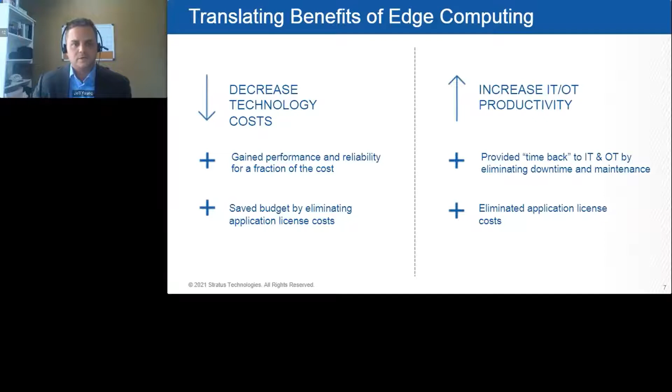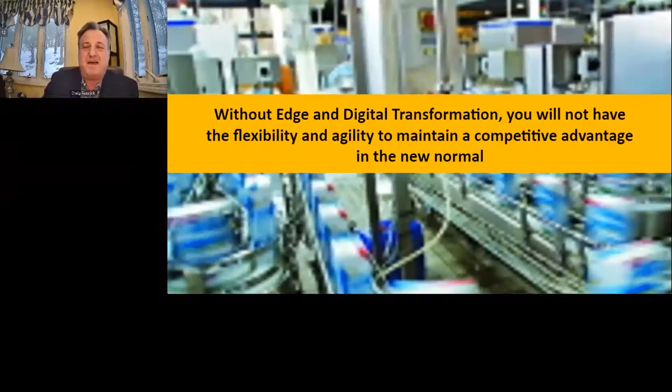And we start off with a very bold statement, which is: without edge and digital transformation, you won't have the flexibility and agility to maintain the competitive advantage in the new normal. And it's pretty strong.

To be very honest with you, once the pandemic hit and we were forced into remote working, social distancing, problems with visibility and flexibility of a supply chain, it really accelerated the whole demand for edge computing. People are so worried about how they're going to continue to operate their plant, how they're going to maintain what's become a very common term since the pandemic: operational resilience. Are they going to survive not only this pandemic, but have an infrastructure in place to survive another catastrophe in the future? Are they able to fulfill orders, especially if they're in a product category in very high demand as a result of the pandemic?

Is my personnel protected? Do I have the right cybersecurity techniques to protect against the fact that I'm now allowing all this remote access I did not have in the past? So we look at how an edge platform can help in that area. These are things designed for automation, for people with an OT background, because now they can be deployed relatively easily. It really changes how work processes are handled, how information is gathered, stored, and executed, because it's at the device level. It still maintains its real-time status and gives people that extra visibility, especially if you're not in front of the machine, whether in a remote knowledge center or working from home. There's really no way today you can be completely effective if you don't have an edge strategy as part of your digital transformation process, especially in this new normal.

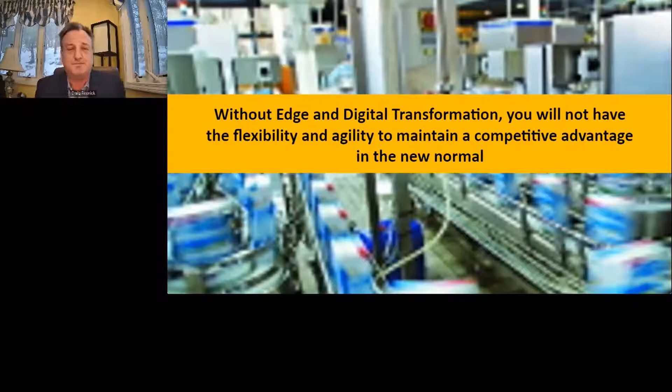Hey Craig, this is Jeff. I have a quick question for you. At a high level, how do you feel leaders are prioritizing digital transformation initiatives right now? As we move into 2021, do you think they're approaching this from a more risk-oriented or reward-oriented position?

I would say our dividing line is March 2020. Before March 2020, people would look at this as something that was nice to have, maybe put in a 3 to 5 year plan. We were still going through the calculations of whether this edge and digital transformation strategy had a payback, and once we got a better handle on that, we'd decide how soon to execute.

Post March 2020, all of a sudden ROI remains critically important, but then the term operational resilience came into play, and that completely accelerated people's digital transformation programs, bringing edge devices to the forefront, because they needed to execute the ability to work remotely and do it in a safe and secure fashion, having information at the device level transmitted to the person wherever they may be, while processing that information in real time with a hybrid strategy working with the cloud.

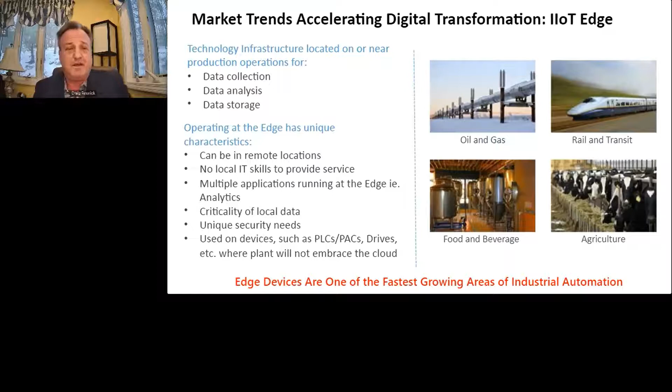If you really did not have this process going on, you probably couldn't fully take advantage of having the edge strategy, because you wouldn't have that ability to get information up into the cloud. Even though the information is processed in real time to avoid any sort of latency, that information, to really close the loop, has to get up into the business systems. That's the reason why cloud and all the applications of the cloud are really so important. So you really have to make sure that you have that whole IT-OT convergence.

At ARC, companies that have really accelerated their process greatly with IT-OT convergence, it's almost getting to the point we sometimes call it IT-OT fusion, because we could see a period of time, 5 years from now, when we may not even see a difference in certain facilities between their IT groups and their OT groups, that they may begin to really fuse into one.

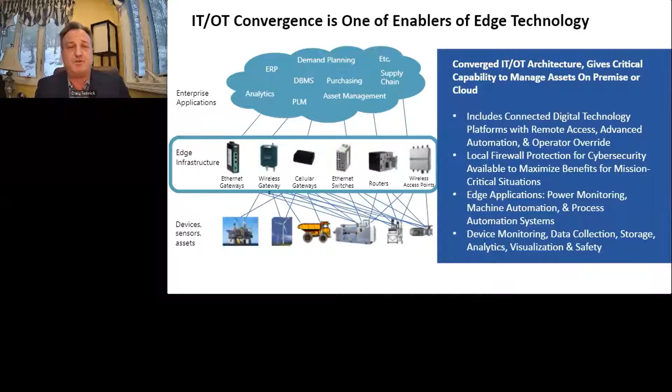So sometimes people will say, when we present edge within many of our end user and OEM clients, well, what's in it for me? Here I am, I've been working for a long time in this industry. Tell me why I need to learn about the edge, both from a professional side and also personally. And it really is part of a whole new way of doing business and operating.

It's really a whole different way of leveraging all the different types of services that are going to be available. So now no longer are you always just collecting money from your customers on the CapEx side of the budget, but now you're able to sell some services and recurring revenue that will allow you to get on the OpEx side of the budget.

And it also helps as companies are beginning to start to sell what we call outcomes instead of products. So instead of just selling you product A, we're selling you a result. So your customers can improve their own business model. So it makes the relationship very, very dynamic.

It's really important professionally that people understand where some of these changes and nuances are in the marketplace. And what it also does is it helps you grow your own professional skill set and your own career.

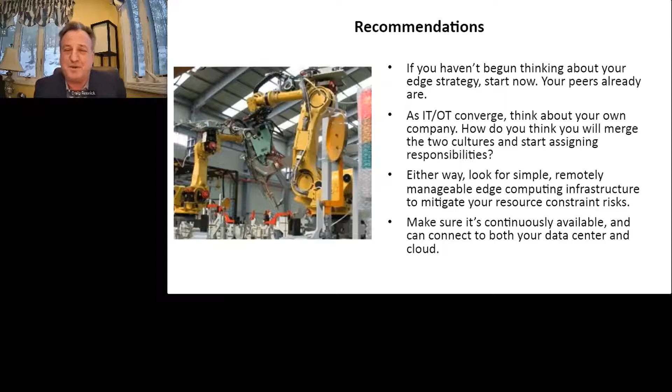Thanks a lot, Craig. So I'm going to talk a little bit about what we have done here at Streamline, and a little bit about what Craig just spoke about - how we can take an OT, an IT project that we've developed for ourselves and turn it into something that actually potentially has commercial value. I'll talk about that at the very end, about where we're going with that.

A little introduction to my company, Streamline Innovations. Our mission is to eliminate pollution through technology. We design, build, operate, and integrate our own units. We call them Valkyrie units, and they remove H2S from natural gas. We also do purification of CO2 streams. We remove ammonia, carbon dioxide, H2S. We are in that space.

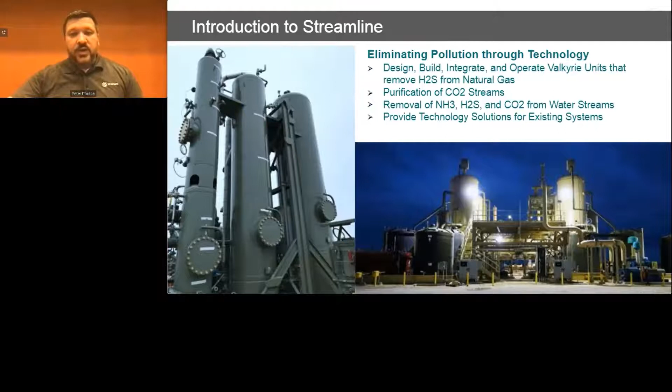We've found that a lot of our work is providing technology through existing systems, so we're doing work on existing builds as well as new builds for ourselves. So this is one of our units - this is the Valkyrie unit, the Valkyrie process.

I don't want to get into too much chemistry and too much talk about our chemistry, but I am going to give a little quick lesson about this. This unit removes hydrogen sulfide from natural gas. Hydrogen sulfide is an extraordinarily toxic chemical that is found in 40 to 50% of all wells in the world. The United States is no exception. Obviously, when you turn your stove on, you do not want H2S, this toxic chemical, coming into your home. So we need to remove it.

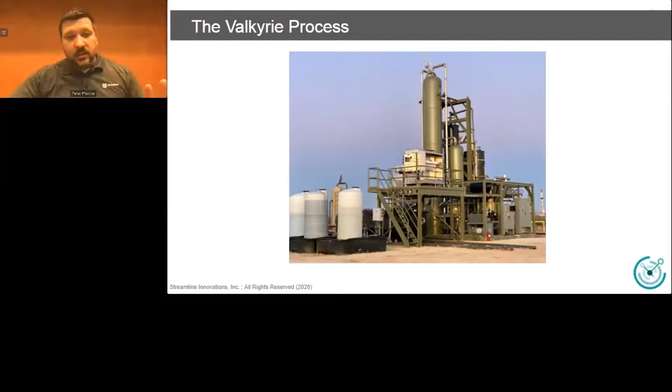There's a bunch of technologies out there, and ours is really kind of a unique process that we have brought out of the old days. It's an old process that we've really brought into a new technology, really through operational technology, and that's what I'll explain. You don't need to know a lot of process or chemistry, but I'm going to put a picture up.

This is the diagram of how the unit operates, but there's two important points. The first is when the gas mixes with our liquid, our Talon chemistry, there's a chemical reaction that occurs, and when that chemical reaction occurs, the H2S is destroyed. If the reaction does not go far enough, it will give off H2S, which is not good. If the reaction goes too far, we'll destroy our chemistry, and as you'll see, we can't reuse it.

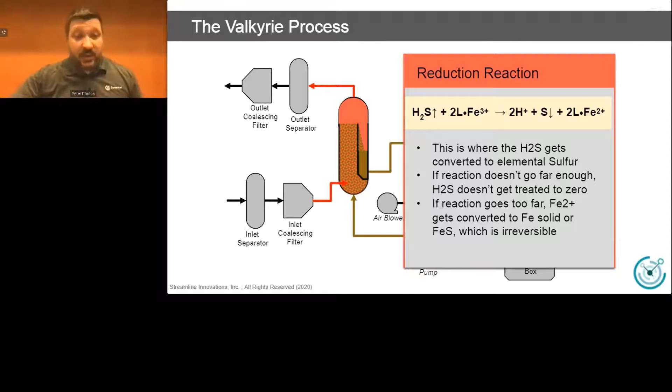So the second thing to look at is our regeneration reaction. We mix our chemistry with air, and we can reuse that chemistry over and over again. So it really is clean tech. It really is our clean tech product.

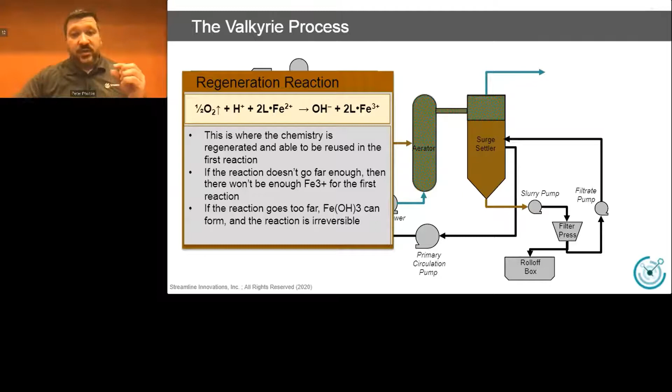But there's a condition. If you don't put enough oxygen into the system, you don't regenerate enough chemistry, and you'll slip H2S. If you over-oxidize the system, you'll burn the chemistry and won't be able to regenerate it. So the short story is we're running this reaction as clean tech, removing hydrogen sulfide from natural gas, and we have to control two chemical reactions within a very exquisitely narrow band.

That's a challenge, because if you think about it, that's not really done except in refineries. But it's more than that. We're mixing, we have the gas flow rate changing minute to minute, the H2S concentration changing day to day. So we have variable inputs, and we have to maintain these chemical reactions.

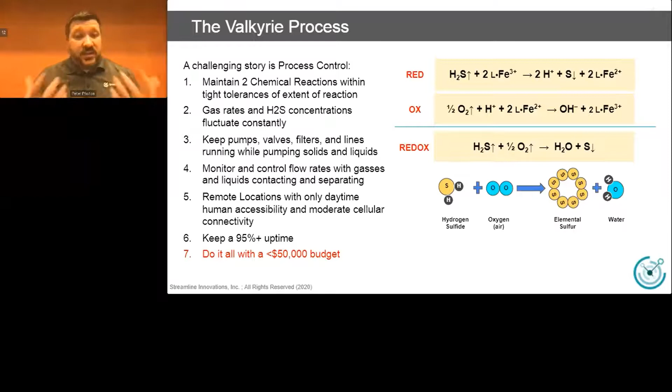We also have pumps, filters, lines, valves, all these typical process industrial equipment that we have to keep running. And then we have solids, gases, and liquids, because we produce elemental sulfur, which is a fertilizer. So we effectively convert this toxin to a fertilizer. We have solids, liquids, and gas circulating through our system, which requires a tremendous amount of maintenance and maintaining levels and flow rates. They can't be too high, they can't be too low.

There's a lot of control going on here. So not only do we have a chemical process that we're controlling, we also have a standard plant that we're controlling, which is also more difficult because of the presence of multi-phases.

Now, to add to the story, these units are typically in remote locations, an hour or two drive from the nearest human, really only accessible during the daytime. Our clients require 95+% uptime, and our entire OT budget is $50,000. Go do it.

It's a very difficult challenge, extraordinarily challenging, which is why this technology was not truly commercializable until this decade, until Streamline really took over and brought in some impressive operational technology tools to help us control this unit and do this task.

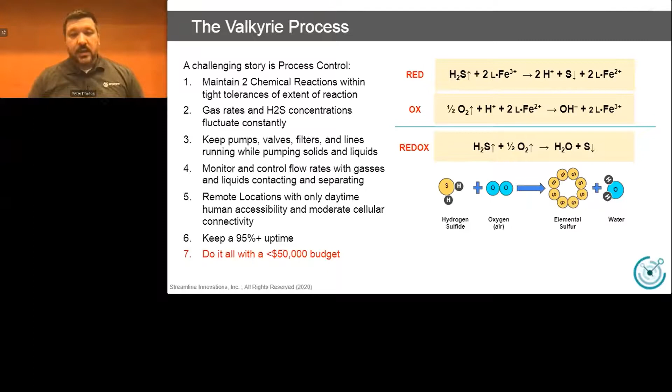So this is our SuperValkyrie project. This was a project in Pecos, Texas, for a client. We're treating about 60 million cubic feet of gas. It's 3 amine plants and 3 Valkyrie plants.

Now, typically when you build these sorts of plants, the rule of thumb is you need about half an FTE per unit. So with 6 units, you're talking 3 operators, and then daytime, nighttime shift, 6 heads, 6 FTEs. It's labor intensive to operate these units. Plus maintenance requires call outs to the site, and the support team needs to go out to the site to control it.

And the mission for this project was to do this with only 3 FTEs. So keep maintenance to a minimum and keep support off site. I'll show you how we did.

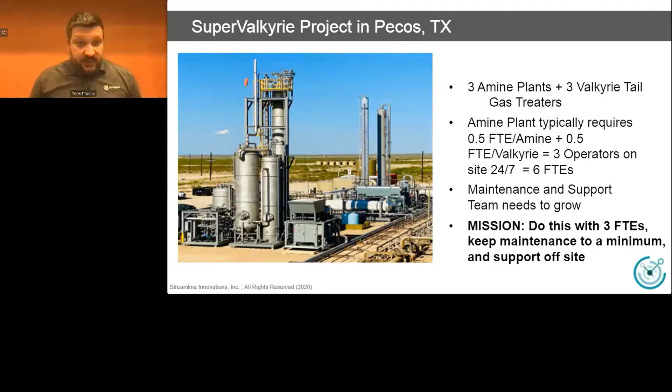So we chose the Stratus ZTC Edge. We chose this for a couple of reasons. Number one, because of the redundant processing, the dual processing in the system is extremely robust. And because we can lose power on one side, or something can go wrong on one side, the other side takes over, we get this beautiful uptime that's really great.

And we're able to put the database on the second virtual machine, and that allows us the flexibility of being able to replicate this unit. So we can make 6 of them, we can make 3 of them quite easily. The computing power is chunky, it's robust, it's got plenty of CPU, and the cost is modest, and it fits in our budget.

And so on this dual machine, we're running Ignition as our communications to our OPC, to our PLC. We're running a PostgreSQL database. We're running Python scripts that do advanced modeling and AI and machine learning, and time calculations of over 20 KPIs.

We have our Ignition gateway. We're doing APIs, pulling in weather from the National Weather Service to the site and using that in calculations like heater calculations and temperature calculations. And then we're also launching a Wi-Fi signal from the box, from the system itself, so that our operators, rather than having to plug into the system or go up to the HMI and touch the screen, could just open their laptop in their truck and actually communicate with the system.

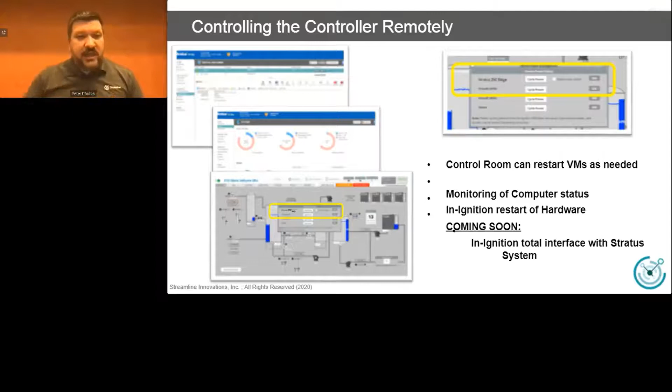So really, we're integrating Stratus right into the HMI, which is a very unique and powerful capability. Here's the results: we're able to build a smart amine plant that is managed by AI 24/7, with a control room that can see this unit 24/7 as well, so we have total connectivity against this unit at all times.

During the daytime, the operators are there. We have 2 FTEs. We said we were going to do it in 3, we predicted 6, and we did it in 2. That's a 66% reduction in labor costs from our estimates.

The call outs are coming from the control room, not from the field. That means we can be more proactive about our calls. We've instituted machine learning that can do predictive maintenance, and the computer can actually call out issues long before the pump actually breaks. That's been a tremendous value for us, and it's all done through the control room.

So Zendesk is integrated into Ignition. When things stop working, it automatically creates a Zendesk ticket. When it thinks it's going to stop working, it also automatically creates a Zendesk ticket. We've integrated all of these pieces together across the entire spectrum, a combination of IT and OT. On top of that, we've reached 99.5% uptime, which is absolutely fantastic. We've blown it out of the water.

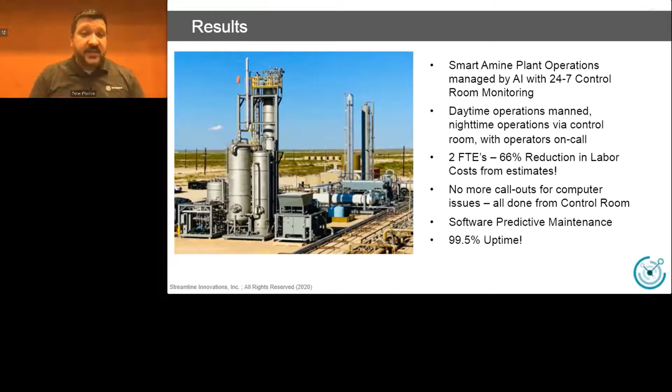So where are we going?

Yes? Yeah, I got a quick question for you, man. That's a great breakdown, and I love the way you explained how you're working on a tight budget. So this is an economical approach, but the way you described it, it seems very complex. For some of our audience who are considering integrating similar technologies into their own solutions, what would be some recommendations that you would make to them to keep in mind?

So there's a couple of important things. Number one, you have to make sure that you have the computing power to be able to do what you need to do, but you also don't want to go too lean. We initially went too lean on our computing power, and we ran into a lot of trouble.

The second thing is don't be afraid to segregate roles. For example, we use an external modem. We used to use an internal cellular modem within the device, and we found we got a lot more robustness when we bifurcated the computer and the modem itself. The Wi-Fi system is separate from the computer box, and that gives us more flexibility so that when the Wi-Fi goes down, that doesn't mean the computer is going to crash, or if the modem isn't working, the computer is going to crash. So there's an advantage to splitting your equipment rather than using a single fit-for-purpose device.

And then the final thing to keep in mind is that with modern SCADA systems and things like Ignition, there's no end to what you can incorporate into the HMI. You could start bringing all of this information into the HMI, and it's not hard. There are modules out there, and companies that build these modules to help you integrate those devices into the equipment.

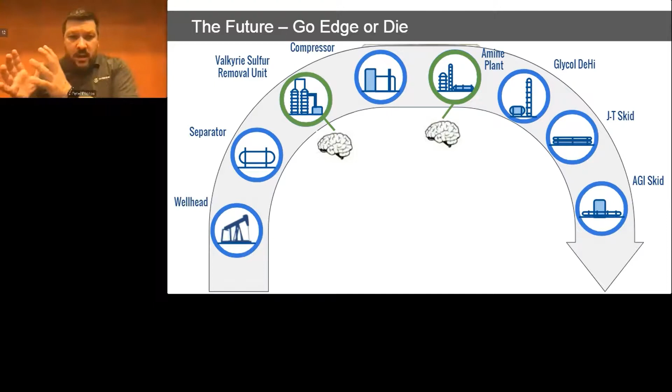We've shown with what we've done already, we've made our Valkyrie smart, we've made our amine plant smart. But there's no reason why we can't take the same methodology, that box running Stratus with a modem, no PLC, just from the Stratus to the cloud, a modem, a Wi-Fi setup, and add that to all of these other systems across the board.

So I'm talking about smart wellheads, smart glycol units, smart JT skids. Some of these are names you aren't familiar with, but you could take any plant you have and start building boxes that contain all of the OT you need to make it smart.

You don't necessarily control the unit, but you're starting to build data. Like I said, 20 KPIs is not a big deal for a computer.

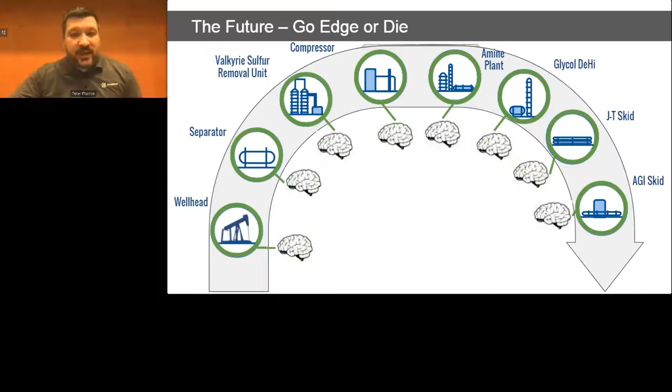We've launched what we call the Valkyrie Intelligence Platform, which is a standalone box that can be integrated into an existing unit. It plugs into any one of these types of devices. We're developing them for about 4 of these right now, but anyone could develop this for any process.

It's powered by Stratus. SEEQ is running in the background doing artificial intelligence and complex calculations like predictive maintenance. It becomes a turnkey package, which makes it so simple because really anybody can build these things, but nobody has the time or resources to do it.

And then finally, the remote monitoring piece, and it becomes something modular. So it's not necessarily a product that anyone can build for themselves. This is really about taking the technology that's available off the shelf and putting it into boxes and making it modular. And this is exactly what Craig had mentioned, that it turns into a service industry rather than an operational technology project. And with that, I thank you for your time, and I turn it back over to you, Jeff.

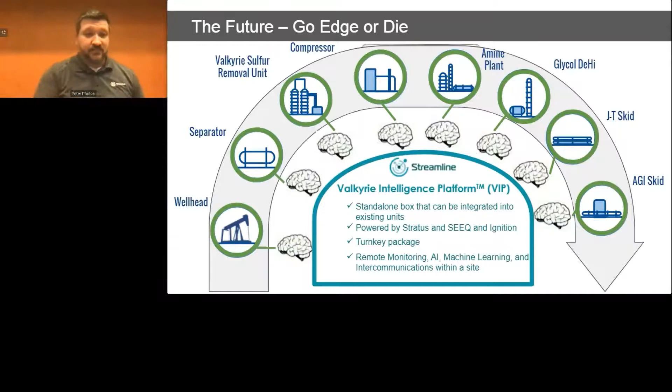Thank you so much for inviting me to tell our story today. So Rubberlite, a privately held company, has been operating in Huntington, West Virginia for 35 years. Can you hear me? It's located on the banks of the Ohio River and is centrally located between the Mid-Atlantic, Midwest, and Southeast regions of the United States. Huntington is also home to Marshall University.

Our campus extends over a city block with 300,000 square feet under roof, and Rubberlite employs 146 people with an average tenure of nearly 15 years. Though we're lean, we supply over 1,600 customers around the world, and our foam is used in a wide variety of applications in practically every vertical market.

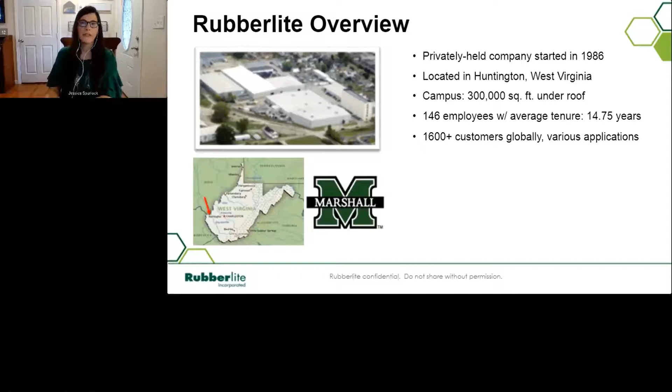Rubberlite's business model revolves around two key operation centers. First, we skive our bun stock cellular rubber products to a certain thickness, and we're one of the largest in the United States at doing this. We're the recognized leader of converted cellular rubber bun stock, attaining the tightest tolerances in the business. We've been doing this since opening our doors in 1986.

And in 1997, we started manufacturing our own foams to replace some of the products we were converting from other suppliers. Since then, we've become a leading manufacturer of custom engineered, medium density, free rise polyurethane foams. This operation center accounts for approximately 50% of Rubberlite's revenue stream.

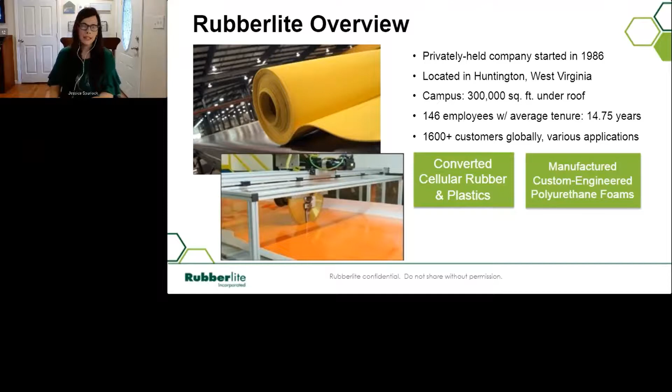In the early 2000s, Rubberlite began offering flexible composite systems and textile coatings as a value add to product from either operation center. The polyurethanes manufacturing department was chosen as the beta site for implementation, becoming the blueprint for the rest of the organization regarding automated process controls, data integration, and a higher level of sophistication and operating discipline. We chose this area because it had the processes and technology in place, and the potential benefits from a successful implementation would provide the most value to the organization.

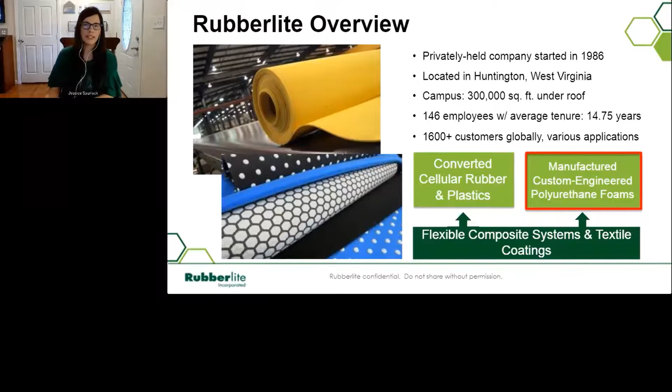Now, in my previous jobs as an engineering contractor, I had the opportunity to develop projects for many organizations of various sizes, diverse industries, and different levels of operating sophistication. Each company faced common challenges as they embarked on their digital transformation journey, and Rubberlite is no exception.

There was no integration between standalone systems on the plant floor. I refer to them as islands of information. We had very limited information on our process. Often we didn't realize the effect on product quality until it was too late. The polyurethanes department was controlled from a single Windows XP computer running on the plant floor in the middle of the production environment. If this single computer went down, the entire manufacturing line was in trouble.

Production data was stored in binders of run sheets for nearly 20 years, where operators would write actuals next to targets whenever they could while making product. This provided a disjointed snapshot into the material's properties. Our standalone InTouch application provided for continuous data collection. However, this single XP computer's hard drive is only 15 gigabytes.

And as we integrated more systems, our ability to log longer durations of data became increasingly limited. Eventually, data was only logged during production runs. No data was provided during idle times, so there was a large gap in our troubleshooting abilities. Exporting the data from the primitive historical logger was cumbersome, and it took us nearly an hour to generate a